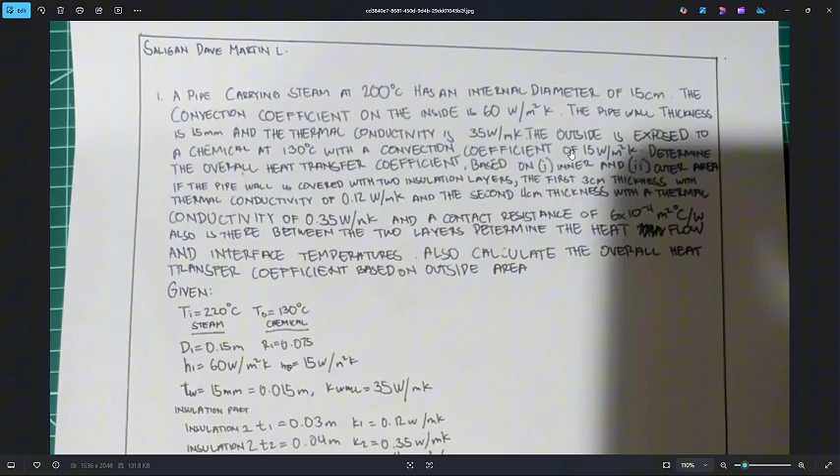A pipe carrying steam at 200 degrees Celsius has an internal diameter of 15 cm. The convection coefficient on the inside is 60 watts per meter squared Kelvin. The pipe wall thickness is 15 mm, and the thermal conductivity is 35 watts per meter Kelvin. The outside is exposed to a chemical at 130 degrees Celsius with a convection coefficient of 15 watts per meter squared Kelvin. Determine the overall heat transfer coefficient.

She'll do the first half of the answer, yeah. I'll answer the rest, I'll take a picture afterwards.

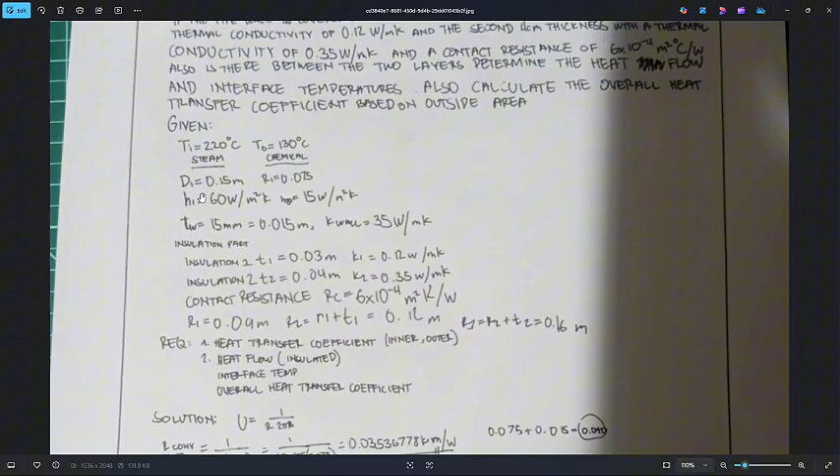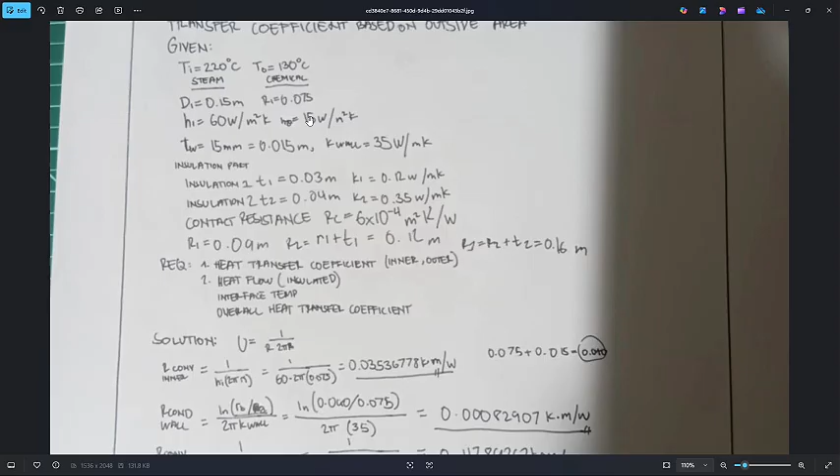Let's discuss this. Our T1 given is 220 degrees Celsius. Our T2 or T outer is 130 degrees Celsius. Our diameter, the inner diameter, is 0.15 m, so our radius is 0.075 meters. Our H1 is 60 watts per meter squared Kelvin for the inner, and the outer is 15 watts per meter squared Kelvin. Then our wall thickness is 15 mm, converted to meters so 0.015 meters. And our K wall is 35 watts per meter Kelvin.

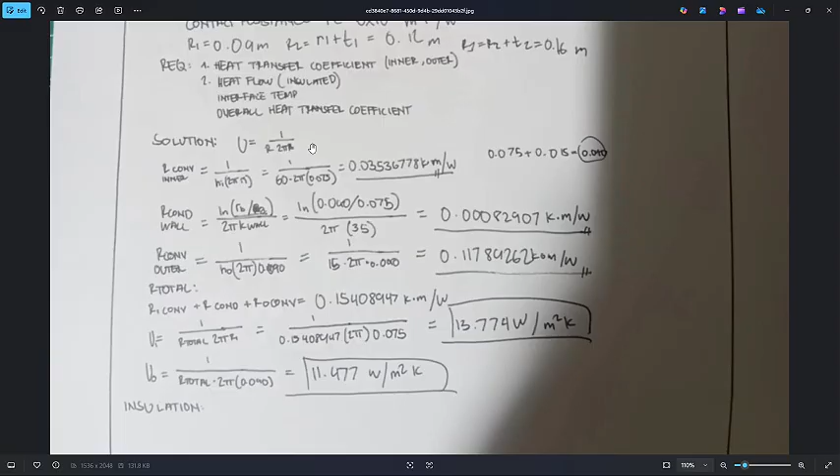So don't mind this, that's for the first half. So this is the formula we'll use: U is equal to... no, U is equal to 1 over resistance times 2 pi R.

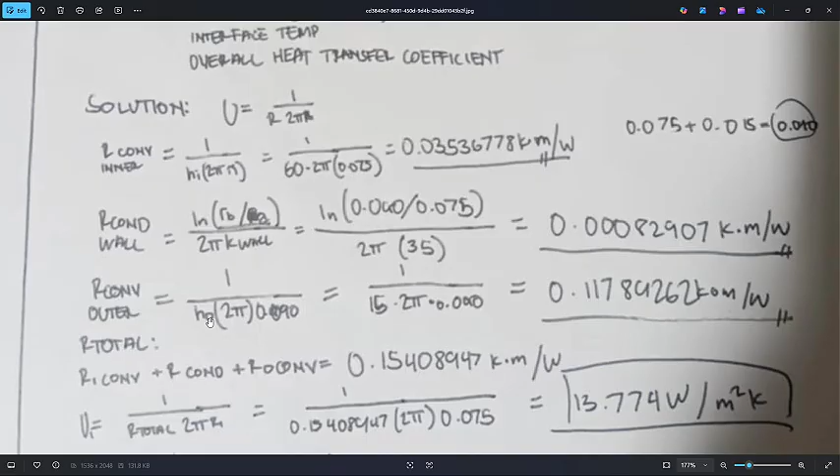So let's get everything one by one so we can get our R total. So what did I do first? The convection in the inner layer, which is from the steam going to that first layer.

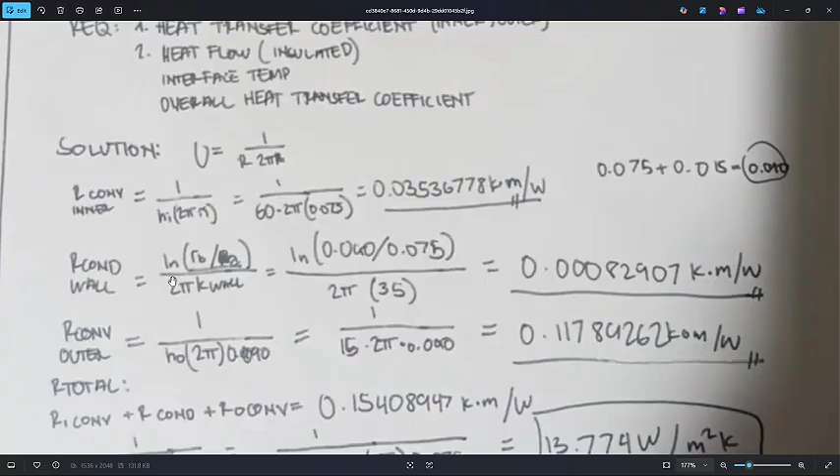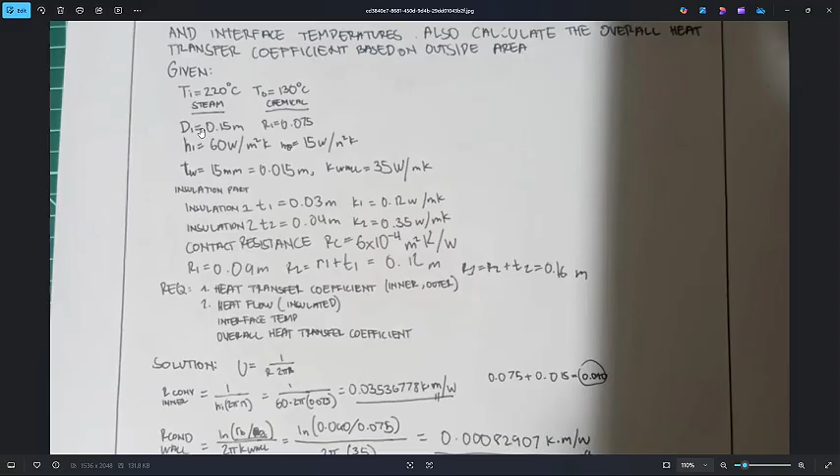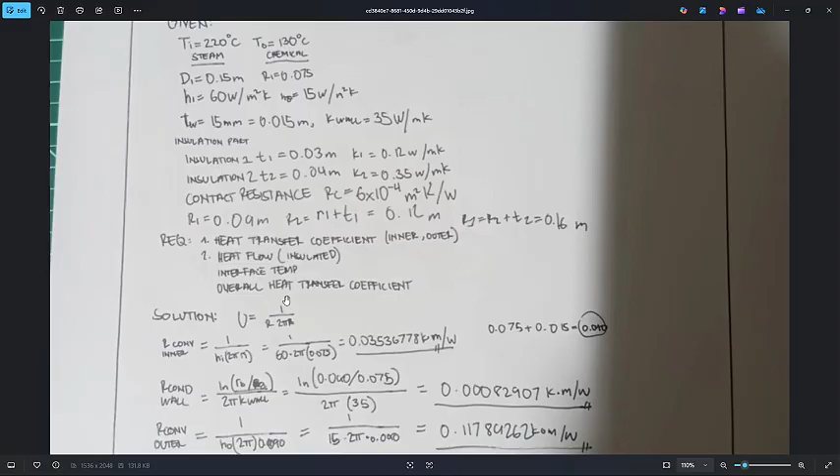So it's 1 over H1 times 2 pi R. Since our given inner value is 0.15, we divide it by 2 to get R. Our 60 comes from H1, or 60 watts per meter squared Kelvin. And the 2 pi is just part of the formula. So plug in the values into the calculator.

The result is 0.03536778 Kelvin times meters per watt.

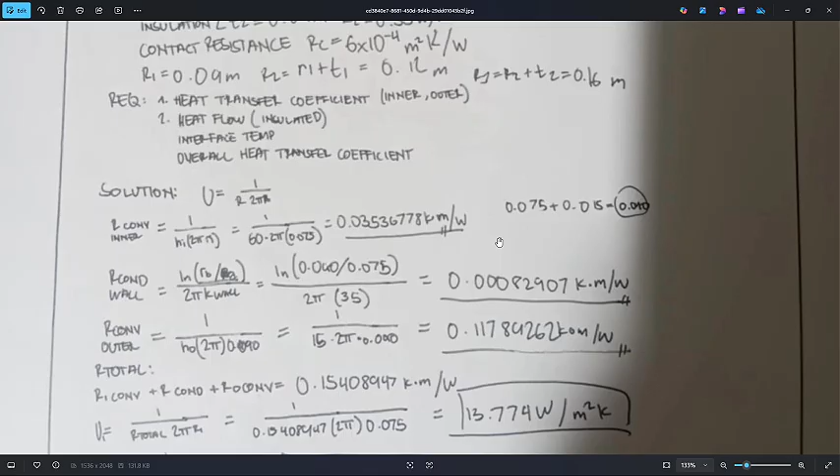And then the conduction through the wall, which goes from the steam to the next layer, from the first layer to the second layer. So this is it, conduction, since it's adjacent. The formula for conduction is ln(RB over RA). So what is this RB?

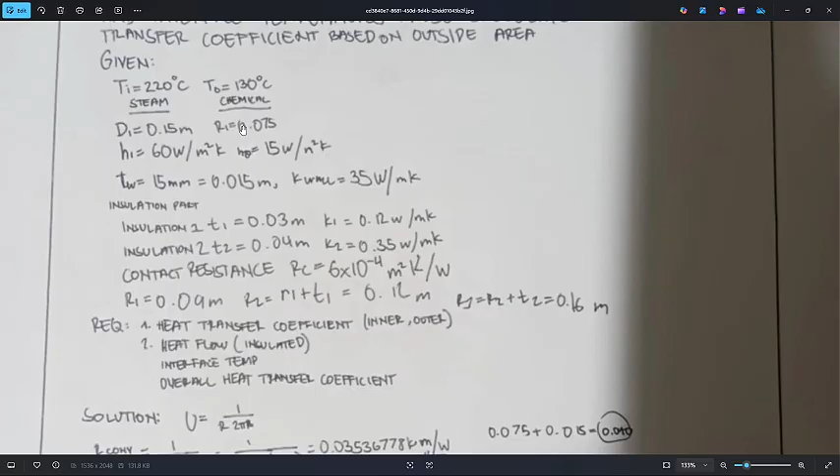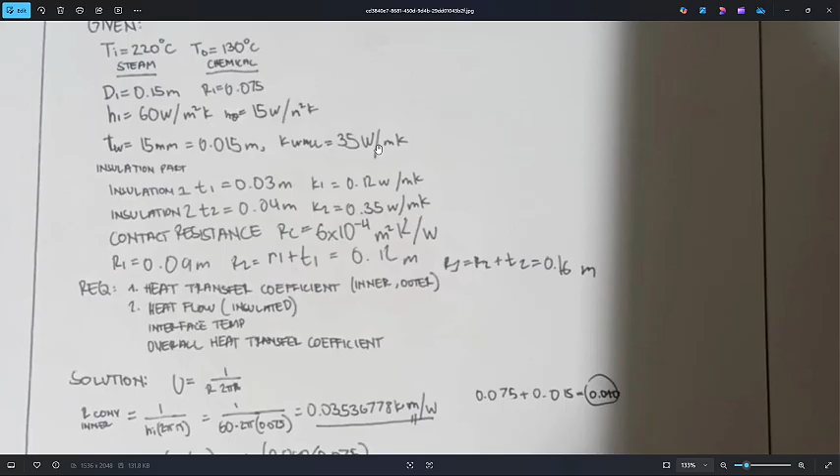Our first radius, the inner radius, is 0.075, over 2 pi times K wall. Our K wall is 35 watts per meter Kelvin. Plug in the values, enter into the calculator, and you would have the answer of 0.00082907 Kelvin times meter per watt.

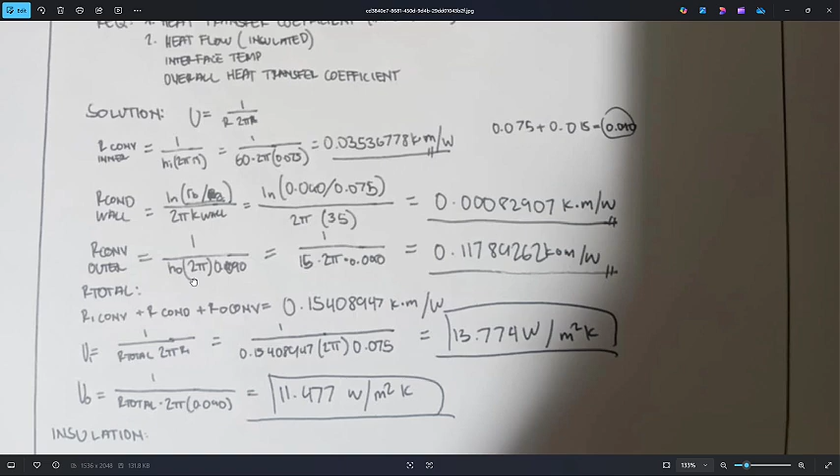Okay, so now convection for what's called the chemical side. So 1 over H outer times 2 pi times 0.090.

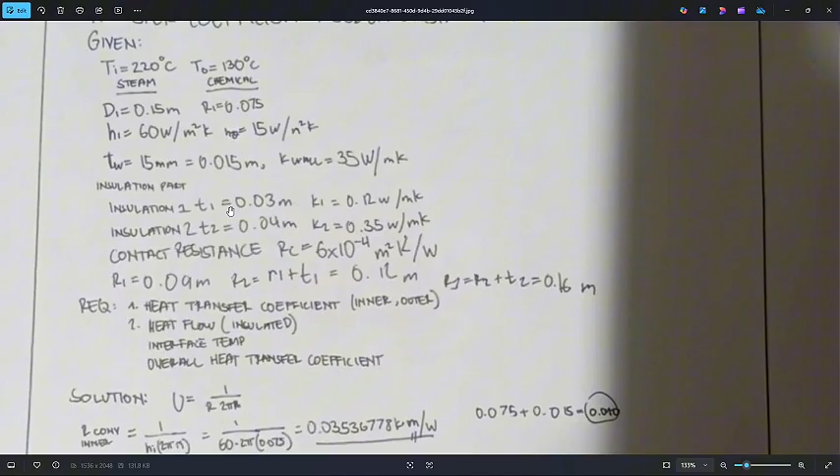Plug in the value, our H outer is 15 watts per meter squared Kelvin, times 2 pi, plug in the values, giving 0.11784262 Kelvin times meter per watt, my bad, not kilometers.

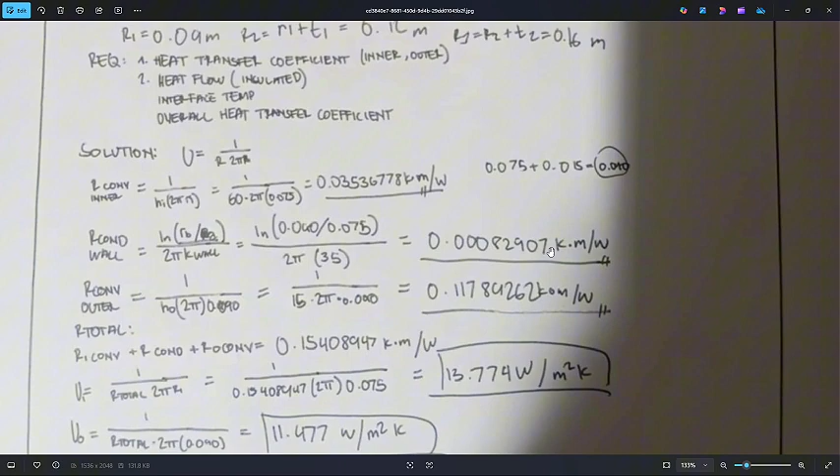So we just add this one and this one, and we would have the R total of 0.15408947 Kelvin times meter per watt.

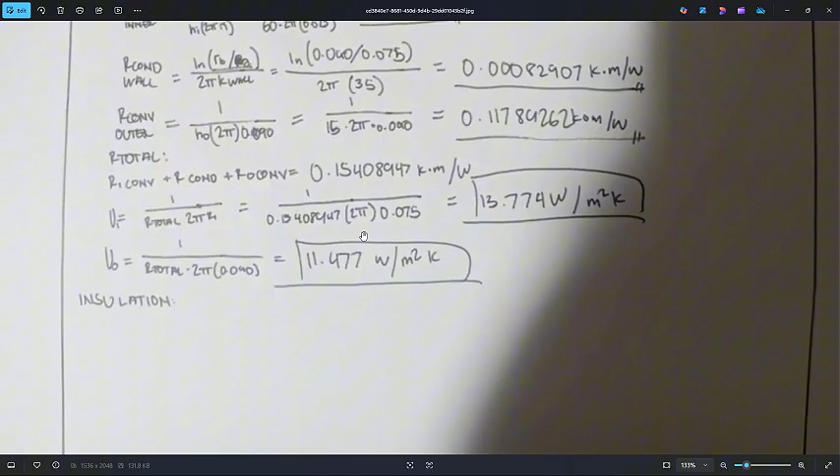I plugged in the values I got. The R total here is 0.15 times 2 pi times inner radius, since it's U inner. Came up with this answer: 13.774 watts per meter squared Kelvin.

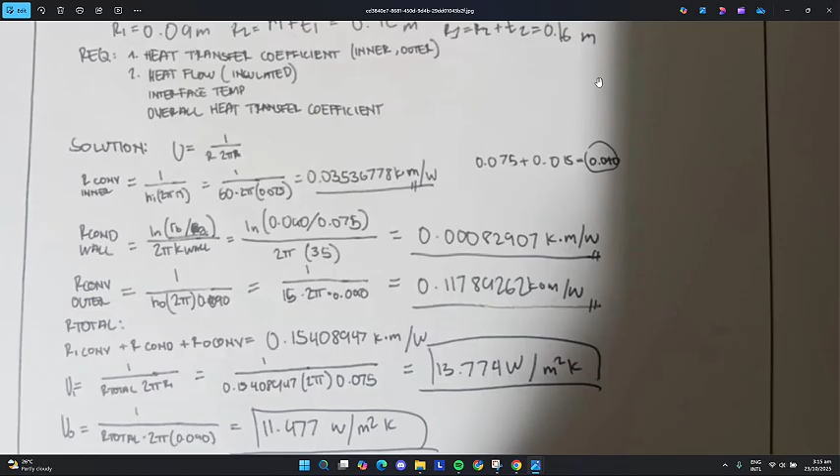Then for the outer, 0.90. Because the thickness is 0.075 plus 0.015. So 1 over R total, which we solved, times 2 pi times 0.90. My bad, the answer is 11.477 watts per meter squared Kelvin.

And for the insulation, I'll add. Wait, hold on. So, I messed up the insulation part.

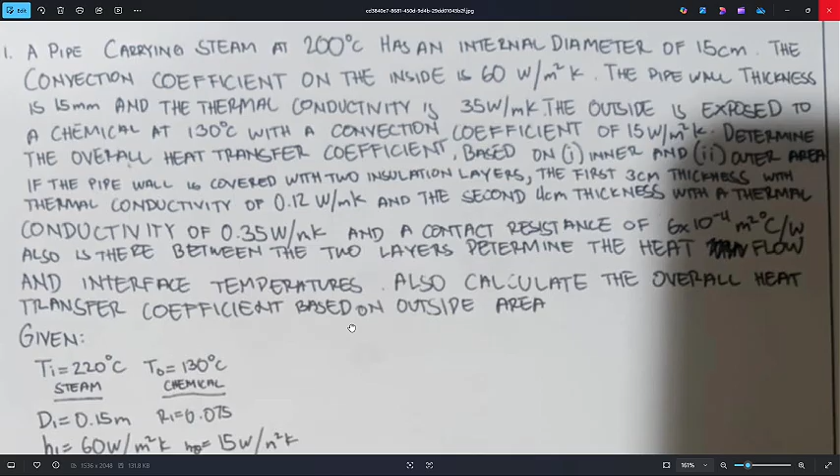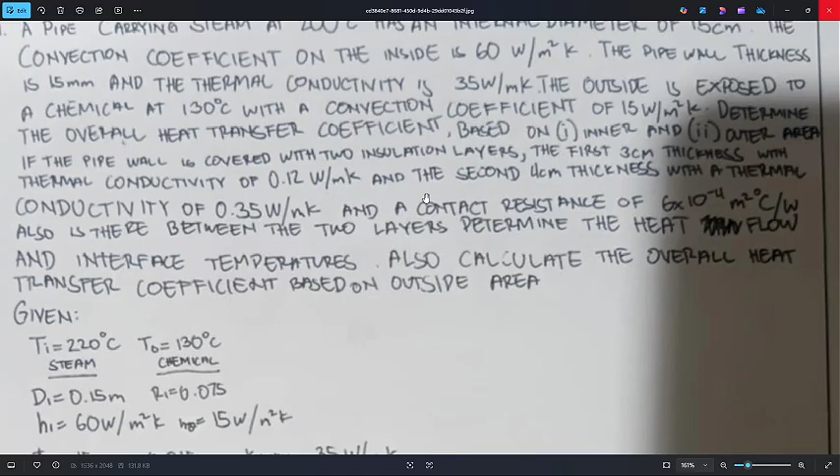Based on inner and outer area, if the pipe wall is covered with two insulation layers: the first 3 cm thickness with a thermal conductivity of 0.12 watts per meter Kelvin, and the second 4 centimeter thickness with a thermal conductivity of 0.35. What we need to find is still the same thing, the heat flow.

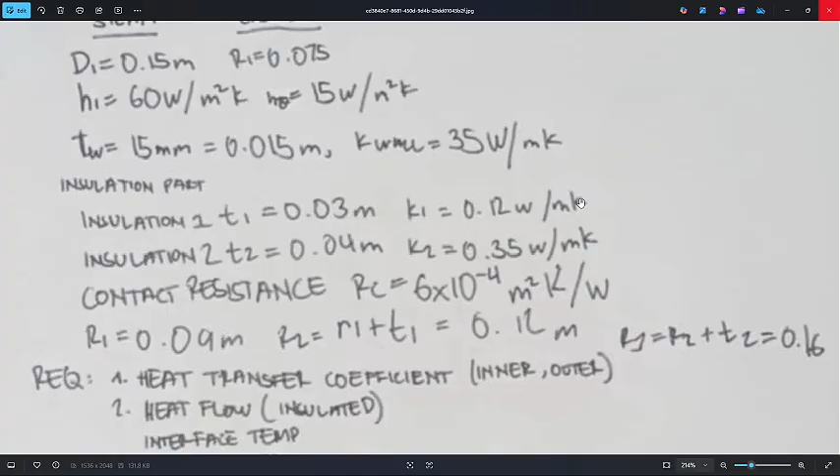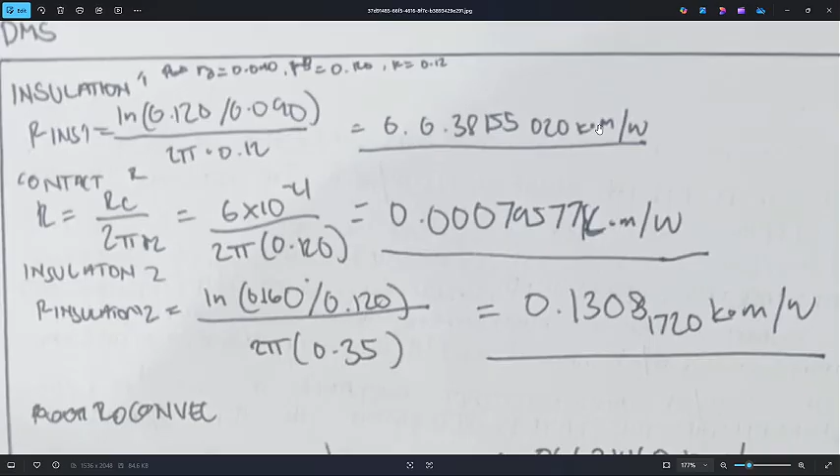R insulation formula is like conduction insulation. So Ln times 120 divided by 0.90. The 120 we got by 0.090 plus the thickness of 0.03, giving 120, then 2 pi times 0.12 watts. So we came up with the insulation resistance... wait, something's wrong. 0.3815520 Kelvin times meter per watt, my bad.

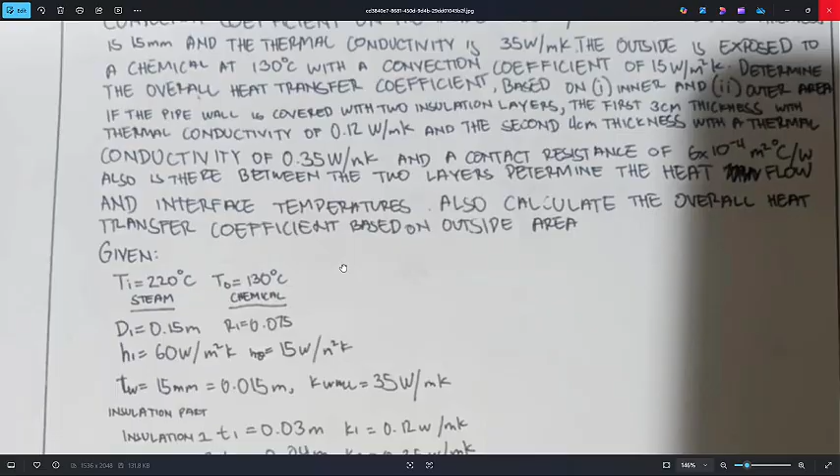Then solve the contact resistance, since it's given in the problem: 6 times 10 to the negative 4 meter squared degrees Celsius per watt. Let me go back there to see the given.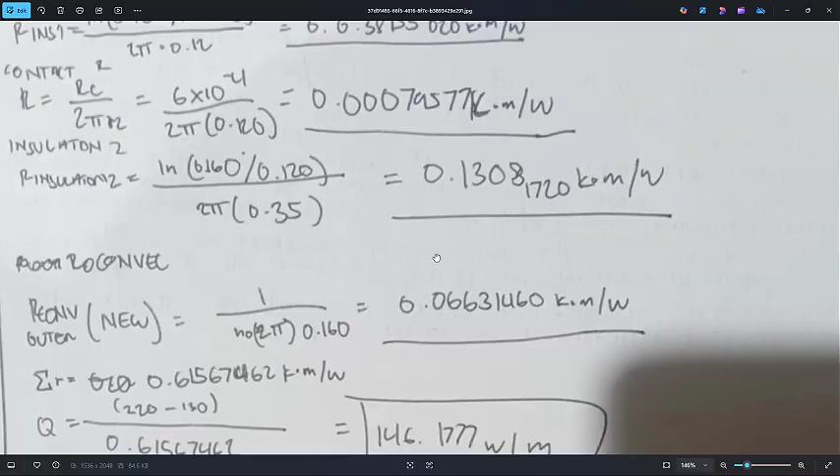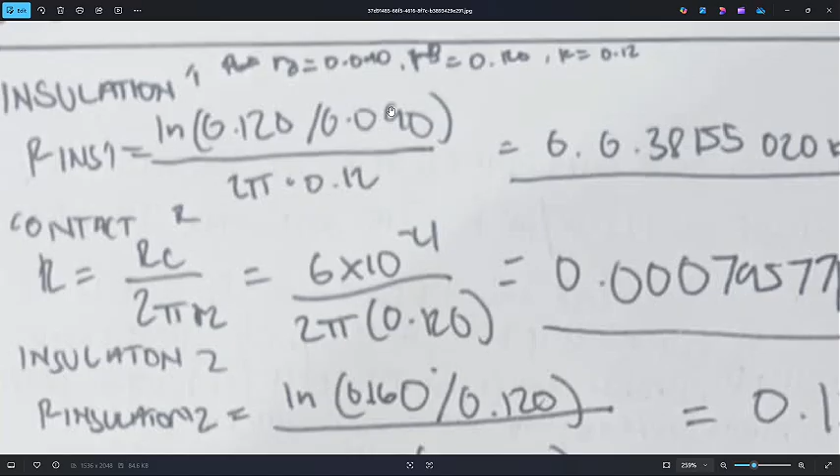Plug in the value: RC over 2 pi R2. The R2 here is radius 2, which is 0.090 plus 0.03 equals 0.120. So 6 times 10 to the negative 4 over 2 pi times 0.12. The answer came out to this.

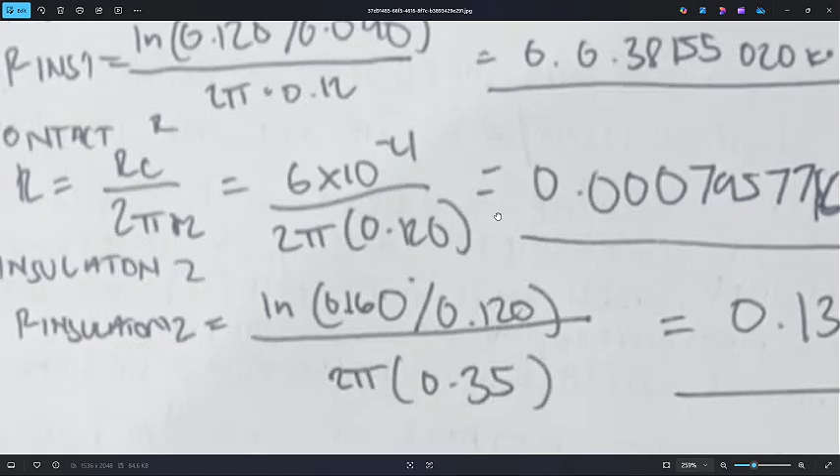0.0007957 Kelvin times meter per watt.

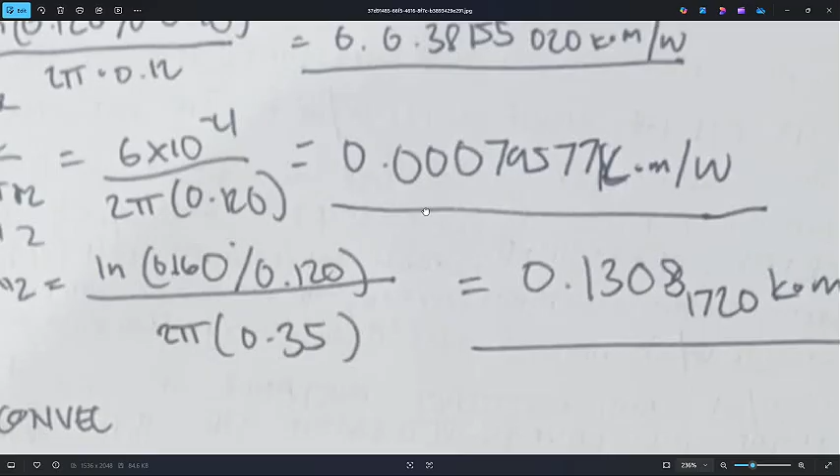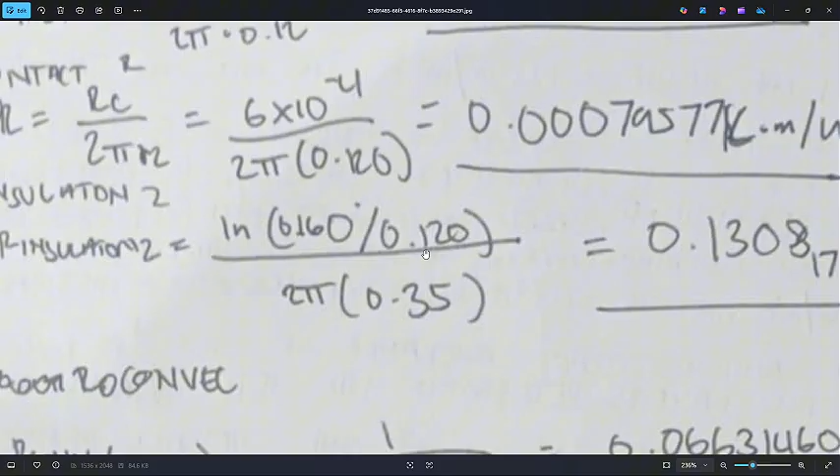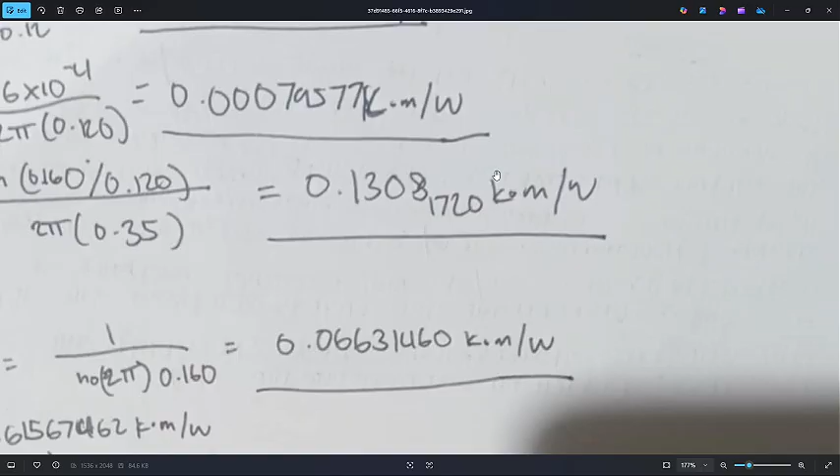Then for the second insulation, R equals Ln of 0.160 divided by 0.120. The 160 we got by adding 0.04, giving us 0.16. So 0.16 divided by 0.12, over 2 pi times 0.35, gives the resistance of the insulation: 0.13081720 Kelvin times meter per watt, my bad.

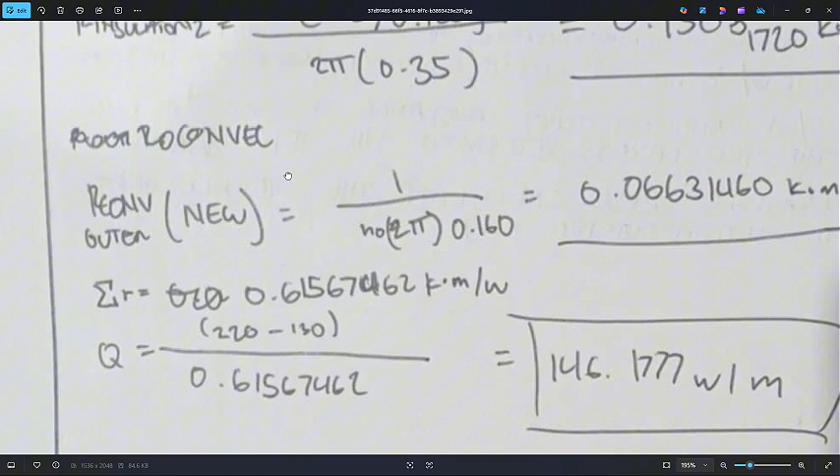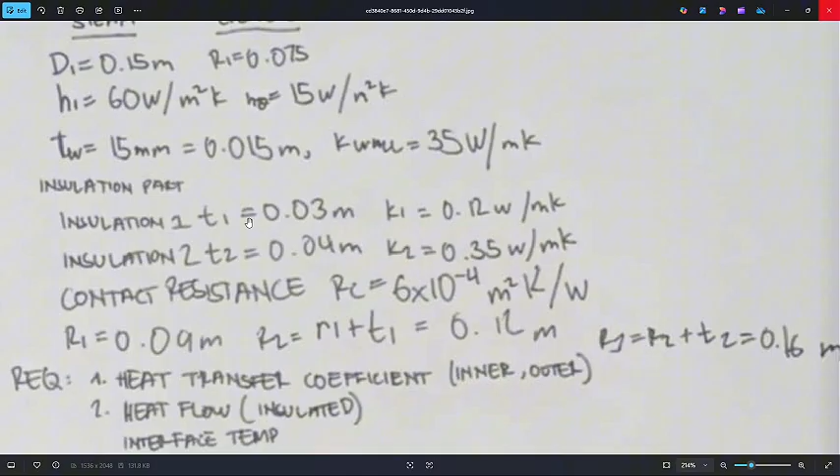Now the convection resistance on the outer layer, since a new layer was added everything changes. So, new formula: 1 over h outer times 2 pi times the new final radius of 0.160. Plug in the values for h0, same as before, 15 watts per meter squared Kelvin. The result is 0.06631460 Kelvin times meter per watt.

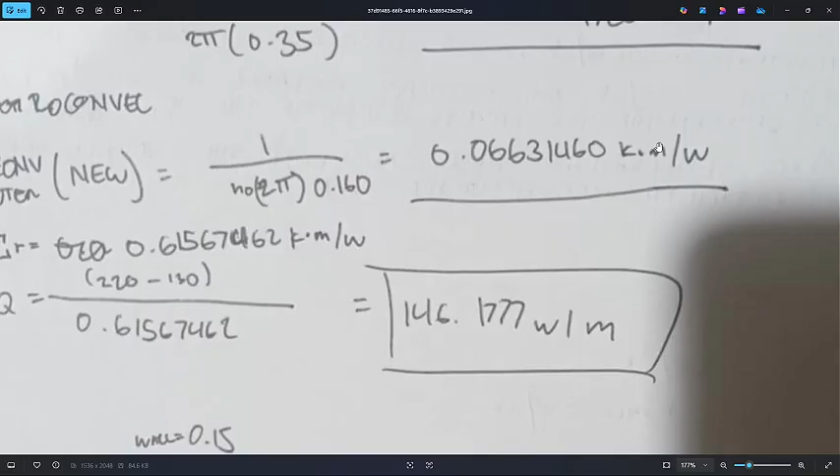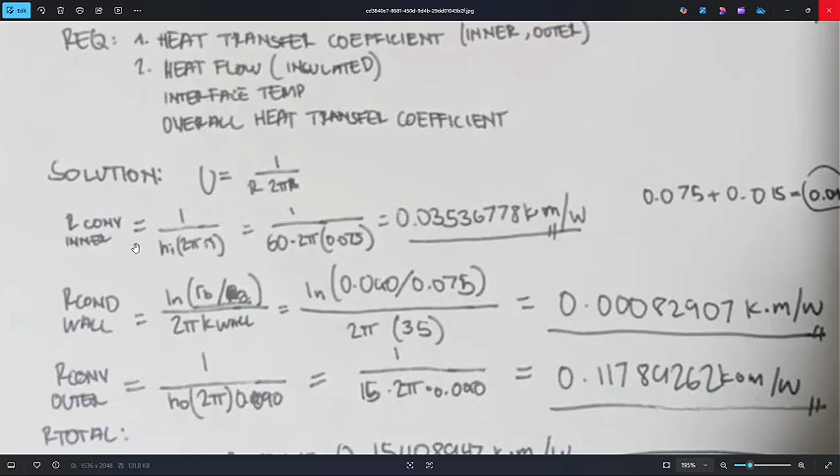So now we have the new resistances. We just add them all together: R convection inner, plus the wall conduction resistance, plus this one and this one. We will come up with the sum of all resistances, the total resistance.

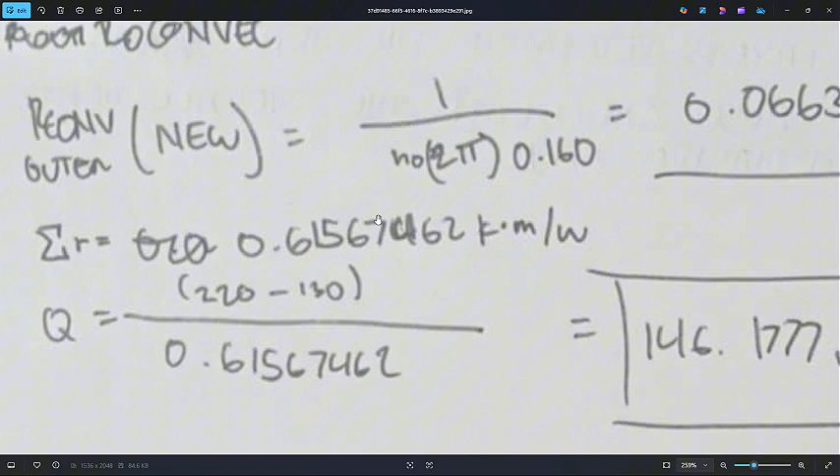0.61567462 Kelvin times meter per watt.

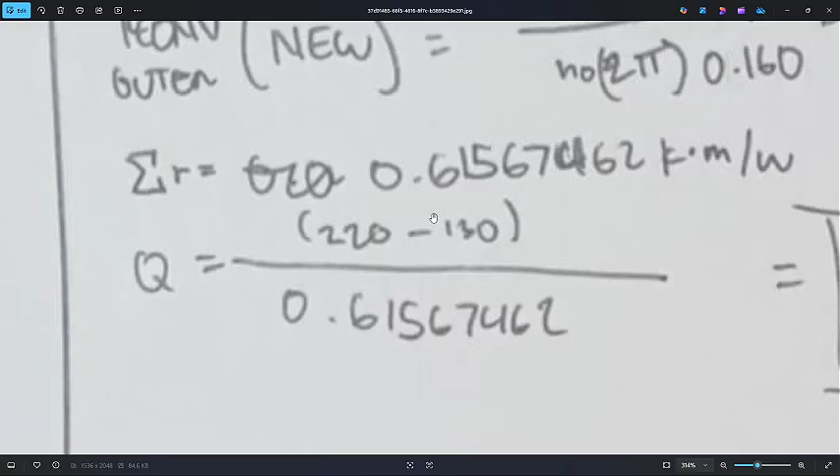So just plug in the value: Q equals the change in temperature divided by R total. The answer came out to 146.177 watts per meter. So that's our heat flow.